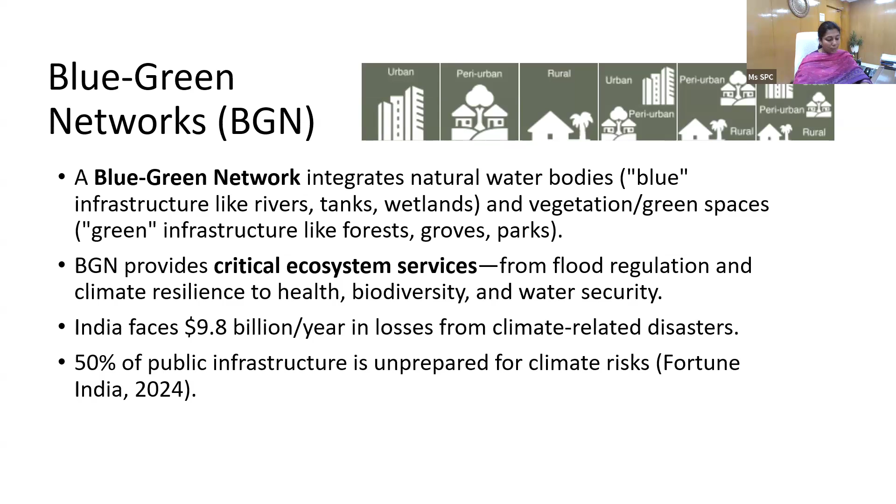In the State Planning Commission of Tamil Nadu, we have a land use research board. The land use research board, with the Aravind Consulting, went about doing a significant exercise of mapping and developing a framework for blue-green infrastructure. We did it at the state level to identify the areas of blue-green network. I'll be explaining all these things in the subsequent slide.

What we went about doing with this framework is developing a strategy to identify and assess the opportunities of protecting the existing blue-green network, and the scope for identifying new areas and avenues in which it could be protected and strengthened further. So a statewide mapping and evaluation exercise was recently carried out. The study is yet to be formally published, so I won't be able to disclose most of the findings, but we have completed this exercise.

In terms of blue elements, we considered all the water bodies, including wetlands and mangroves. Mangrove falls both in the green as well as blue segment. Tamil Nadu, like most states, has got a lot of sacred groves, and reserve forest is an obvious green element. We also assessed the unused land potential, and tried mapping the blue-green opportunities in the unused land as well.

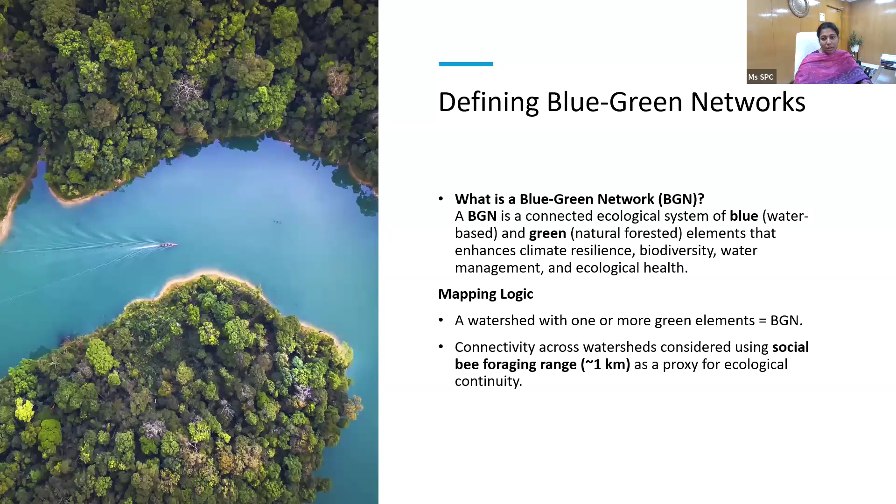We also went about analyzing the ecosystem services it's been providing. Ecosystem services is something not very unfamiliar to us. Different kinds of ecosystem services are there: provisioning services, regulating services, climate regulation, cultural services, and a few other parameters apart from the four popular ecosystem services were also being considered.

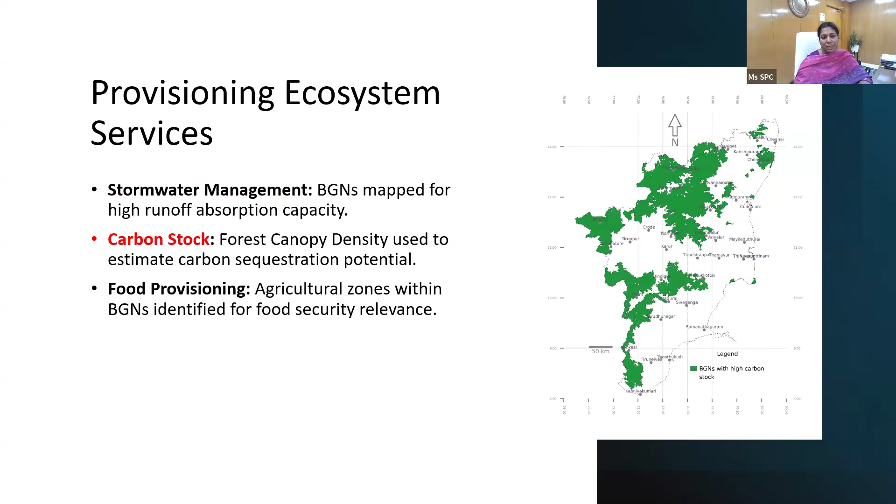For example, this is one opportunity we went about analyzing: stormwater management. You can see the figure of what the blue-green network elements are and which can help in stormwater management. This slide shows the carbon stock potential of utilizing this blue-green network, and food provisioning and all that. In regulating services, soil erosion is one major thing, apart from air quality and water quality. So we went about doing this.

Why are we talking about this with respect to heat? Because urban forest and climate is something Tamil Nadu has been a pioneer in climate action. The SDG India Index 4.0, released by NITI Aayog, also places Tamil Nadu at rank number 1. We jumped from rank number 11 to rank 1 within a span of 2-3 years, because the action on climate and a lot of other mitigation aspects helped the state secure this position.

A lot of analysis was also done taking up this blue-green infrastructure to see how it can help in mitigating heat. Not just this, we also went about doing a lot of urban heat island mapping, identifying the hotspots of the urban heat island effect in the cities of Tamil Nadu. Tamil Nadu is so interested in urban heat island because the state is highly urbanizing, and our urbanization percentage is estimated to be around 52 to 53%.

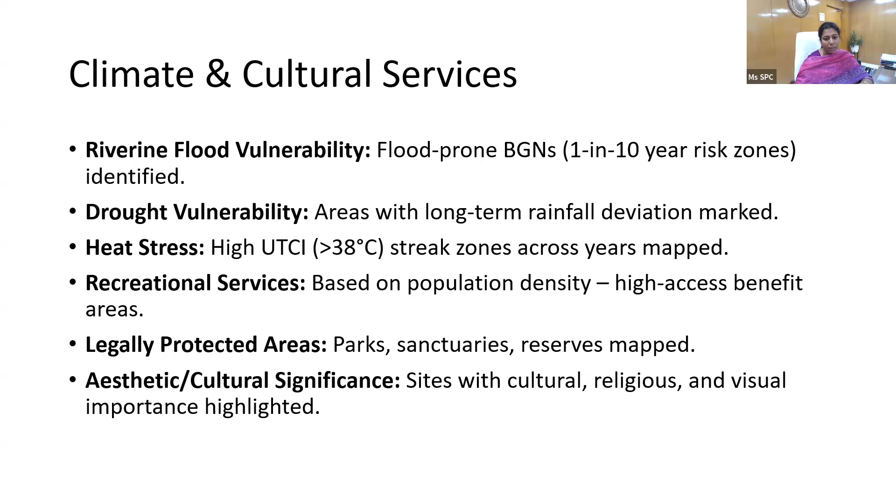That gives us a huge concern about how this urban heat island effect has been significantly affecting vulnerable communities largely residing in urban areas. That was the main reason we took up heat. Tamil Nadu was the first state to declare heat as a state-specific disaster. A lot of mitigation strategies and heat action plans for cities are also being worked out, and a lot of work is being initiated for heat mitigation. This blue-green network identification and potential mapping was one other initiative we took. Apart from heat mitigation and other climate aspects, the BGN also supports biodiversity and network integrity.

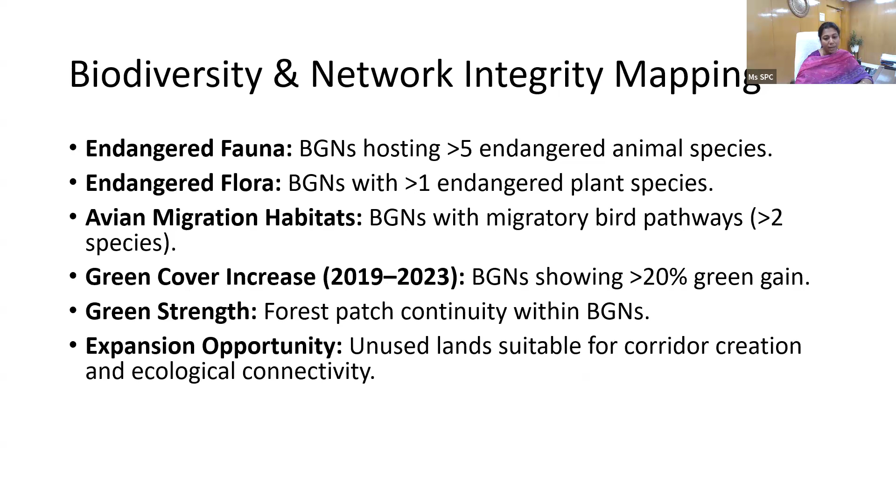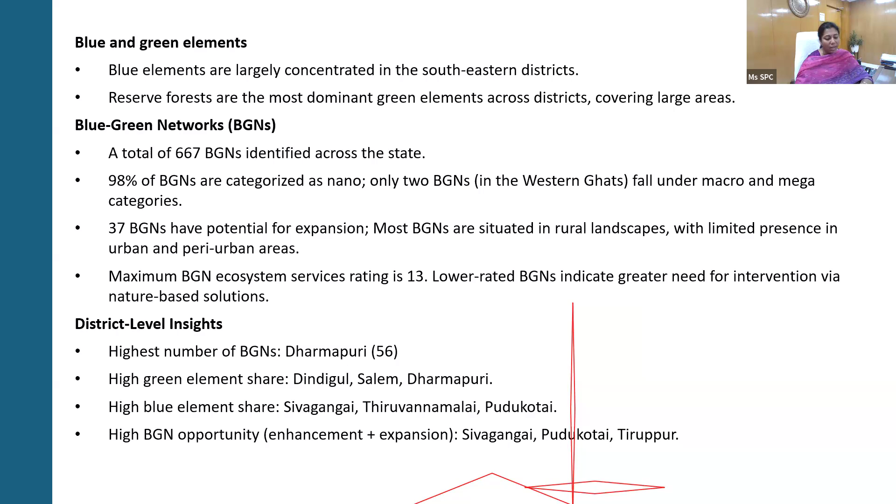By means of network integrity, the green cover strengthening and the opportunity of expanding in unused areas is also significant here. These are the findings: we have about 667 blue-green networks across the state, most of them in the nano category. We are trying to identify mega categories and have got good results, along with potential sites where this could be developed. The opportunities for expansion in unused land have also been identified.

This relates to the activities the state has already commissioned under the Green Tamil Nadu Mission, where within 10 years there is an aspiration of planting 265 crore seedlings to significantly increase the tree cover.

Tamil Nadu has the highest number of Ramsar wetlands in the country. It also aims to increase mangrove cover to support disaster resilience and to increase livelihood opportunities for fisher communities.

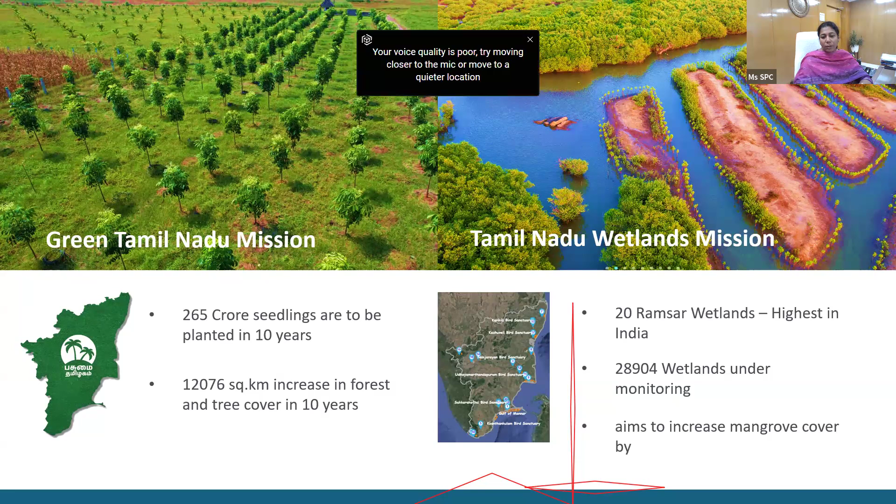Some other initiatives taken by the government include the Sponge Park initiative by the Corporation, with about 150 sponge parks being installed. Sponge parks are one of the popular blue-green infrastructure types, and we know how they've significantly helped cities like Chennai, which faces very frequent flooding. So not just in terms of heat, but also in helping control other disasters, blue-green infrastructure supports a lot.

The CMDA is also actively considering blue-green infrastructure's potential and trying to get it integrated into the third master plan development. About 100 blue-green centers are proposed to be established across the state in the coming years. With this, I end my presentation here.

Yeah, I'm open for questions.

Great, thank you. Thank you so much, ma'am. Thank you for sharing those insights. It's great to see the efforts being taken to improve blue-green infrastructure.

My question is specifically around the urban heat island effect. We know there has been a decline in mangroves and green spaces even in Chennai city, much like other parts of the country. So what are your plans currently to increase green shaded spaces and greening of the city, to ensure that people most exposed to heat stress are able to rest during peak heat wave days?

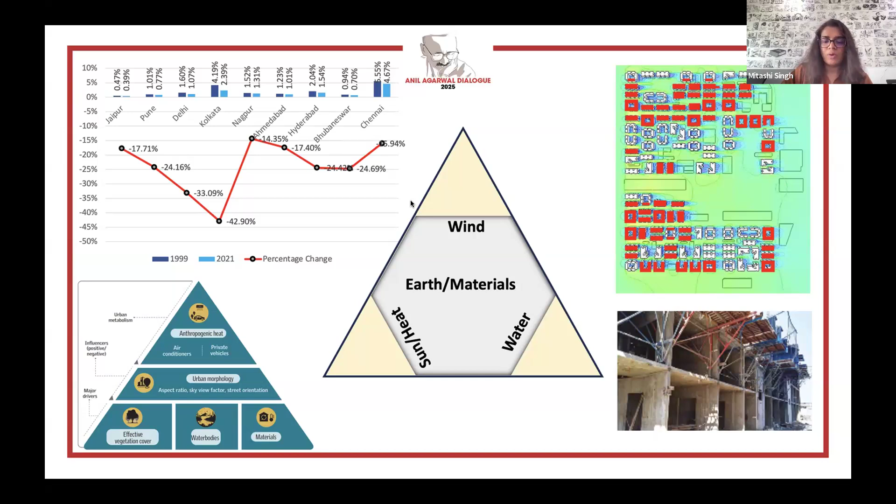So speaking of wind, let's start with wind. What we have seen is that a lot of group housing is coming up in the country. We know land is a scarce resource, and we have to go for a group housing approach. Self-constructed single-story or double-story dwellings are not feasible for our cities anymore. So group housing or mass housing is everywhere in the country now.

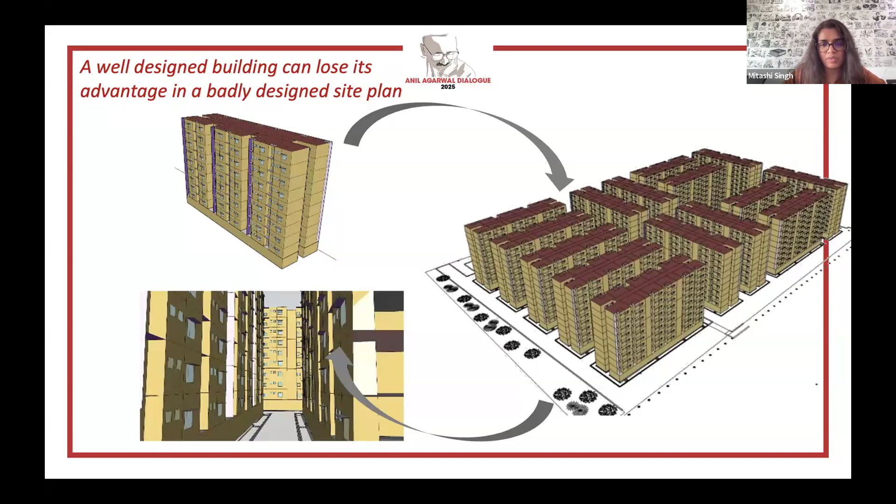Now what happens is when these layouts are done, nobody thinks of the ventilation, nobody thinks how the ventilation is going to be, nobody looks at the natural wind patterns in a given locality. We studied one such mass housing project in the country and found nearly 60% of the blocks were either too windy or less windy, basically not getting adequate ventilation by design. So how do we deal with that? We need to understand this.

Many sophisticated simulation tools are available. We did this using computational fluid dynamics, using MicroFlo software. So these systems and tools are available, but unfortunately, in academia, education, and also in practice, there's very little knowledge about these tools and approaches. So this is about ventilation. Now going on to sun, going on to what nature is doing for heat.

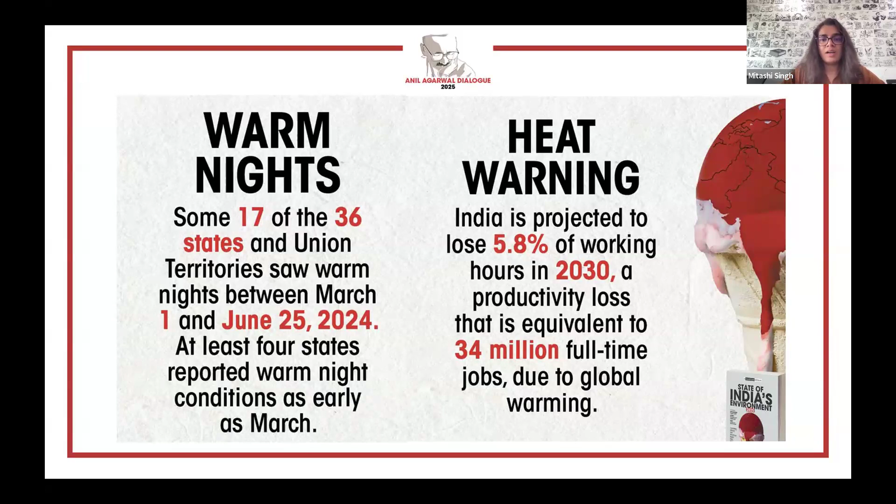All of us are aware that warm nights are becoming a problem. CSE's annual publication, State of India's Environment, found that 17 of the 36 states and union territories saw warm nights in the previous year, and this year also. People in Delhi NCR can feel it right now - the heat is enormous, and it doesn't look like it's going to be pleasant anytime soon. So warm nights are a problem, and they're linked to many adverse public health impacts.

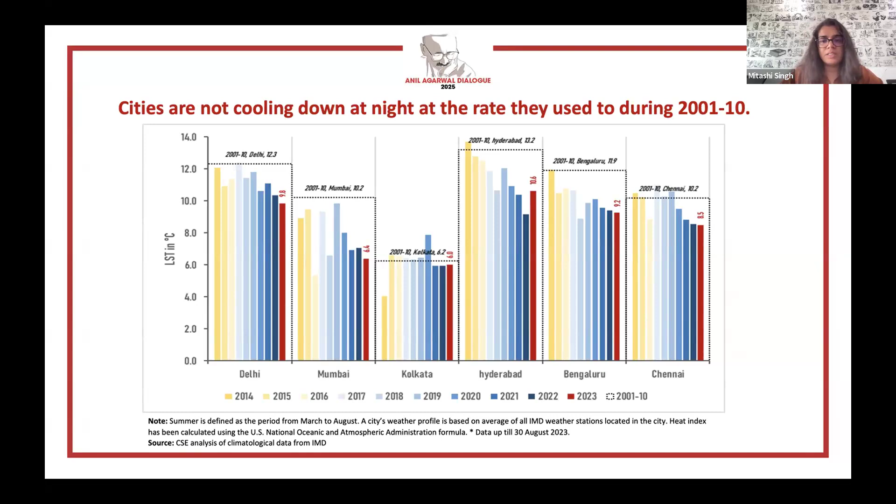If we look at historical data, we can see that cities are not cooling down. The delta that was, in case of Delhi, about 12.3 degrees, has reduced to 9.8 degrees. This means our major cities are not able to cool down on their own, which means the urban heat island effect is more prominent at night time. We need to ensure our systems are planned so that we don't trap the heat from the sun and instead let it go back to space as it should.

To understand this, we analyzed this for 9 cities, now 10, and saw that all climate zones - warm, humid, composite, hot and dry, moderate - are behaving similarly. Land surface temperatures are breaching 45 degrees Celsius again and again. In terms of spatial area, more than 80-85% of a city's area is under heat stress, facing such extreme temperatures repeatedly. This study and its findings were published in Down To Earth's cover story, 'How Hot is Too Hot.' You can find this on our website, and this publication will tell you what we found.

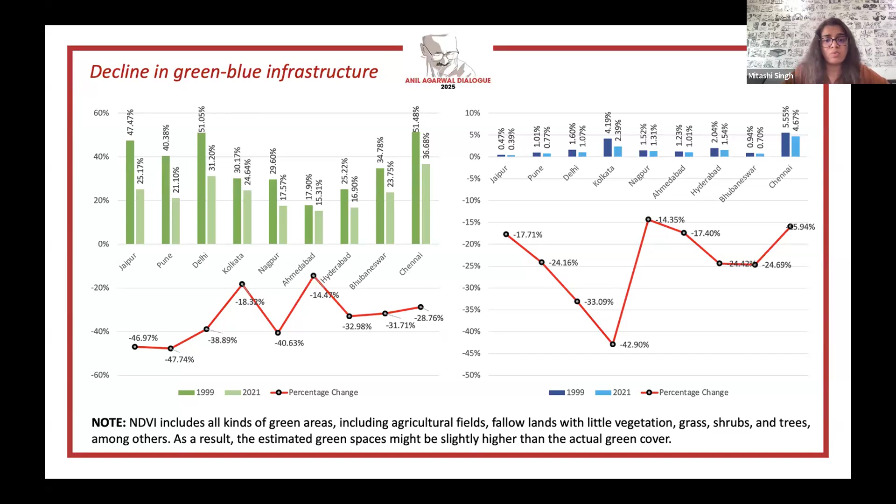We understand that green and blue infrastructure are a very important part of a city's shield. These are the sinks that trap heat energy, use it in evapotranspiration, and prevent the city surface from trapping a lot of heat from the sun. But as green and blue infrastructure reduces and paved surfaces increase, we are trapping more and more heat coming from the sun.

So how can we reverse this process? Yes, this is reversible. To do this, we have to understand 3 aspects: urban cover, urban structure, and urban metabolism. While cover is the larger distribution of green-blue infrastructure and paved surfaces, urban structure is a detailed breakdown of how buildings are clustered, what kind of surfaces they have, their orientation, how much pavement, roads, and such surfaces there are. It also includes the canopy cover of trees around buildings - basically, the total quantum of shading available in a given neighborhood. This is scaled down to a neighborhood or building level.

Speaking of urban metabolism, there are certain urban practices that eject heat into our environment. AC is a classic example, vehicles are a classic example - these are big heat ejectors. But we also have small heat ejectors, like our laptop computers, which also generate heat that goes into the ambient environment. When this heat ejection is quite high, the ambient environment heats up very fast, and because it's hot outside, we run our air conditioning double the amount we would in other scenarios. This creates a vicious cycle because we're not able to regulate urban metabolism well through our planning and natural cover.

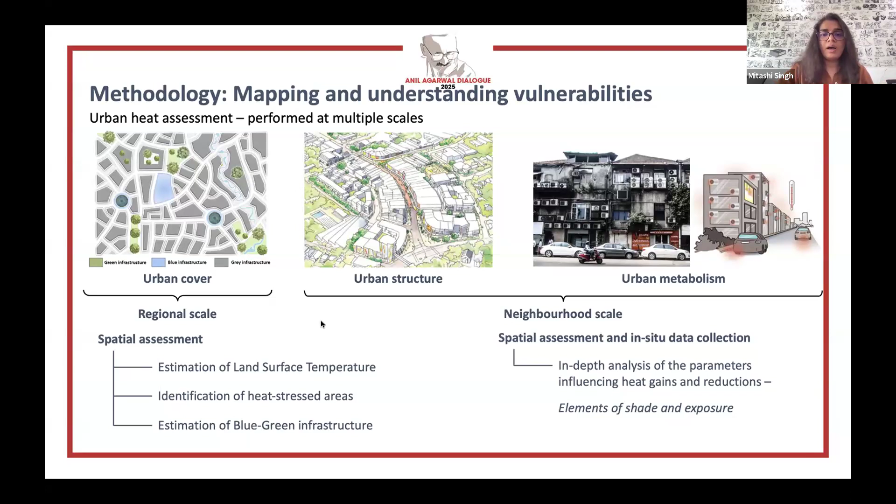So now, all our discussion has boiled down to this element of balancing how much shading and how much exposure there is in our cities, and also what kind of anthropogenic activities are present in our cities.

I cannot go into much detail due to paucity of time, but to understand shading, we explored factors like sky view factor, aspect ratio, and canopy cover of trees. Exposure depends on what kind of material is in the buildings—if heat-trapping material is exposed for longer, it absorbs a lot more heat. We also look at impervious spaces and barren areas, because all these elements trap heat. Surfaces with greens and water are not trappers, instead they are sinks.

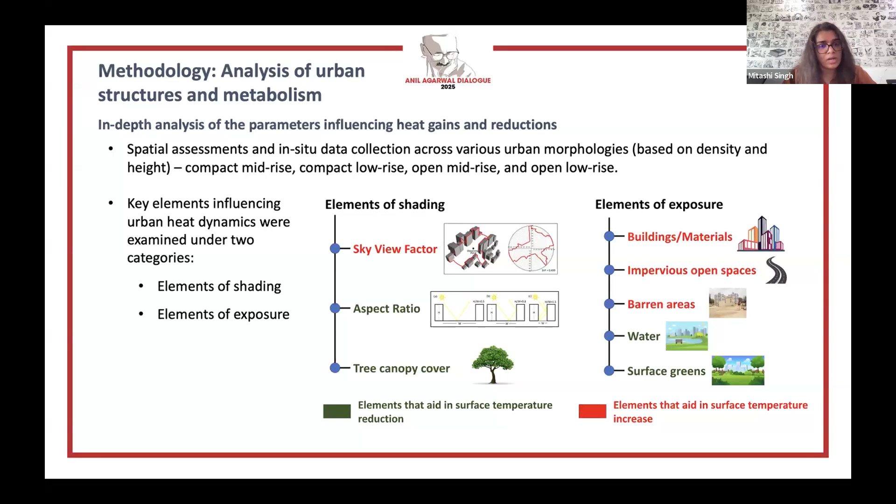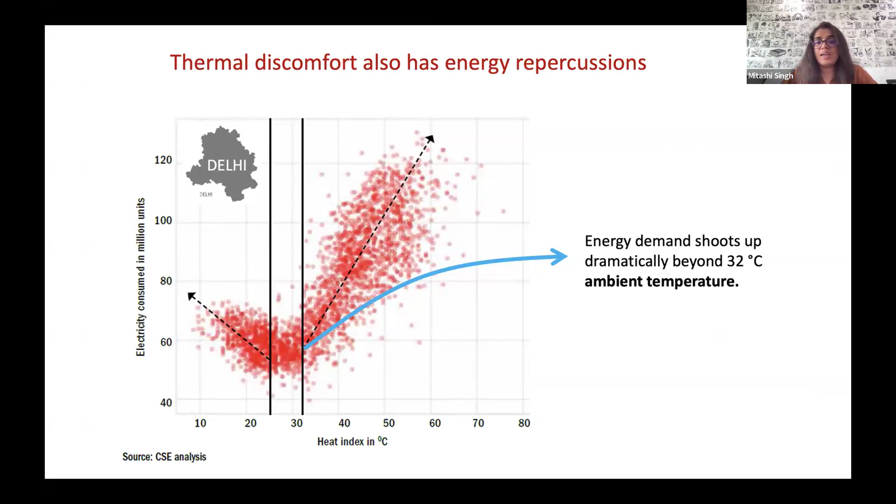The distribution of all these elements is important because this graph shows a dramatic relationship between ambient temperature and electricity consumed. These parallel lines are what we call the sweet spot in our cities. When temperatures just hit 30, 31 degrees, electricity consumption is quite low, but the moment it breaches 32 degrees Celsius, you see a jump in consumption. Our bodies understand thermal discomfort and what ambient temperatures can do to our comfort.

But the problem is we do not factor this into our material choice, building design, or planning. Research we did a few years back shows concrete is becoming a dominant material. I don't want to sound harsh, but in Delhi there's a lot of redevelopment going on—starting from East Kidwai Nagar, residential and commercial buildings have come up. What material have they used? Only concrete. Not just the roof, plinth, slabs and pillars, but entire walls are made of concrete. Imagine what such amount of concrete will do to our indoors.

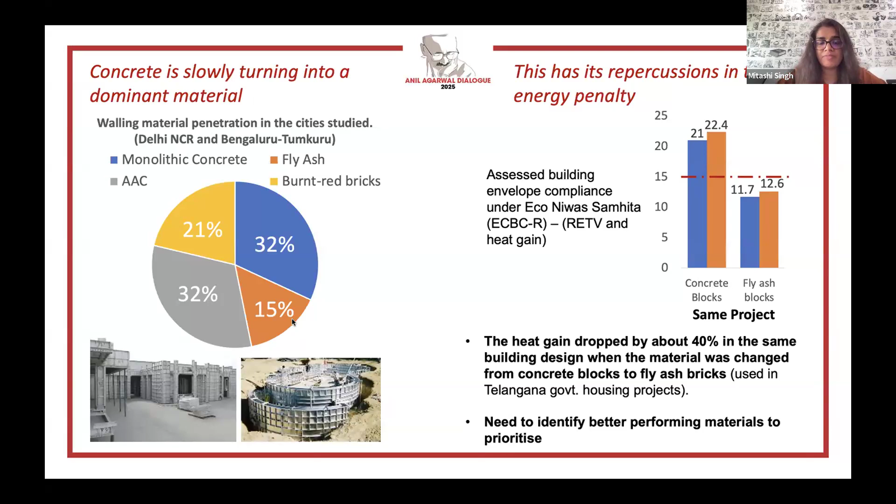This concrete is also reinforced with steel. Steel is a good conductor of heat, metals are good conductors, and concrete also gets heated up very fast. So when you put such materials in buildings, the EPI—the Energy Performance Index—which is way below 50 in a naturally ventilated building, jumps 6.5 times because it pushes the need for air conditioning.

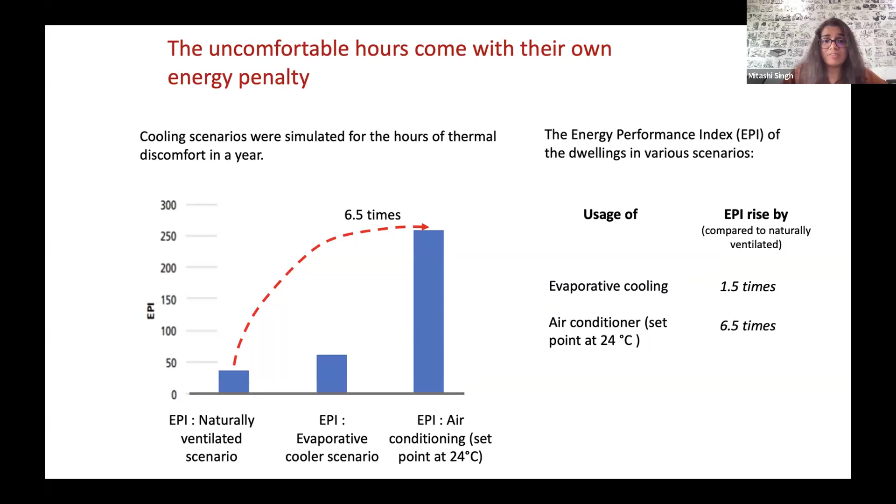This is the impact we're actually dealing with in our cities. Sadly, this impact is counterproductive to the commitments we have. India has the Panchamrit commitment to net zero, and when we do not have a wise selection of materials, a good choice of materials, we jeopardize all these commitments.

But the good news is there are a lot of tools that tell us how to reach this net zero commitment—India's long-term low carbon development strategies, India Cooling Action Plan, Energy Conservation and Sustainability Building Code. A latest version has come up, and Eco Niwas Samhita has come up. These are wins we now see in our cities because these codes guide us in a good direction. But unfortunately, these codes are not all mandatory, so as planners and policymakers we need to push these codes towards mandatory adoption.

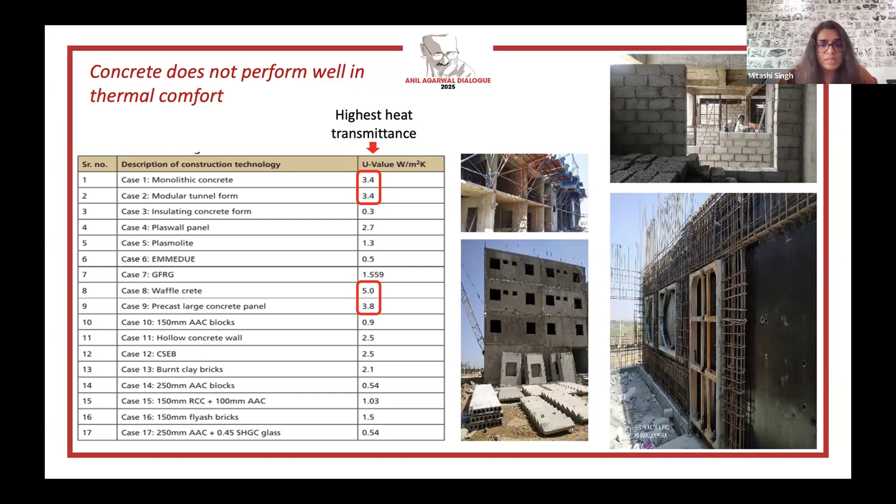We have a lot of materials in use in mass housing. We evaluated them, and monolithic concrete, modular tunnel form, wafflecrete, and precast concrete all have a U value of more than 3.4 to 3.8. In Eco Niwas Samhita, they're looking at a U value of about 1.5 or lesser. So you see where the difference is, and how much the difference is.

So I'll try to summarize now. To address this, we're working on campuses because passive design and dealing with the microclimate requires design, but also requires low carbon cooling systems, because we cannot completely eliminate the need for cooling in our buildings—70% of India's geography has high temperatures, especially receiving hot temperatures in summer. So we will have some requirement of cooling, and we have a very good opportunity to slow down the transition to energy-guzzling air conditioners.

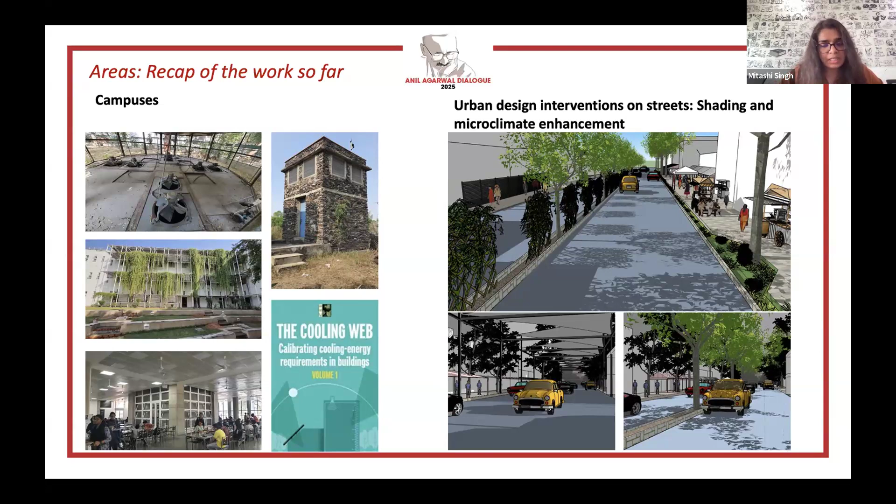All these practices or cases are summarized in one of our publications titled 'The Cooling Web.' Other than this, there are a lot of compendiums by the government also—for example, BMTPC has come up with an indigenous innovative material compendium.

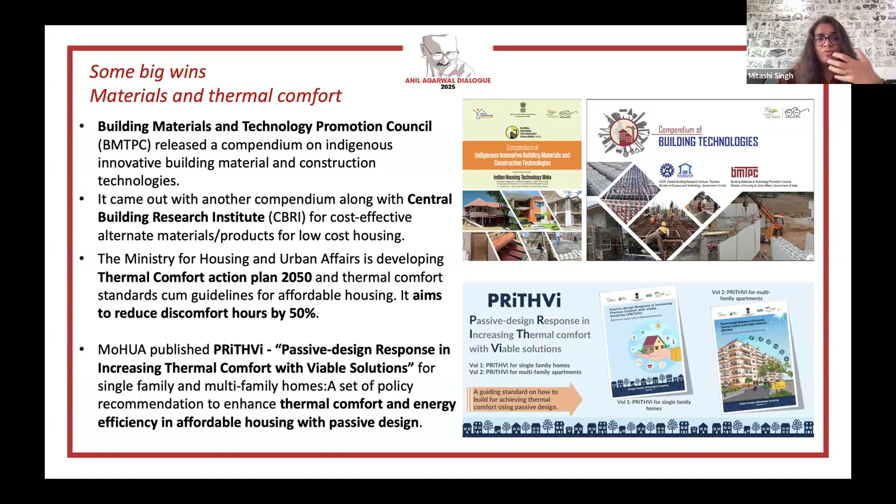There is a thermal comfort action plan under preparation by MoHUA. There's also a Prithvi program that talks about increasing thermal comfort in affordable housing. So a lot of knowledge is out there, but the problem is we need to get it under implementation. Now, how will this get implemented? By creating a demand for thermal comfort.

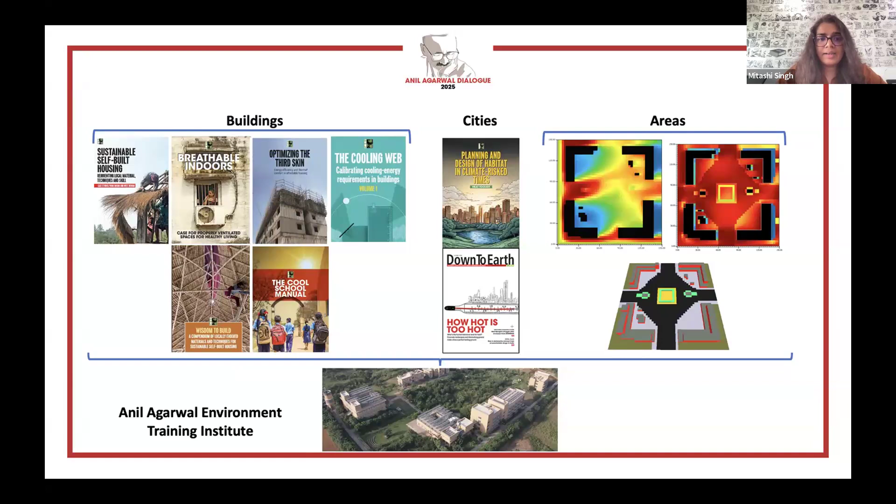I know it's very difficult to change human mind, but that is exactly what we need. CSE is working on this. We have a campaign called Cool It, and under this we are releasing information to create literacy about thermal comfort, so that people know how small design decisions and measures can help them prevent energy consumption, reduce energy bills, and also keep their health in good shape when it comes to thermal discomfort. That is the work we're doing.

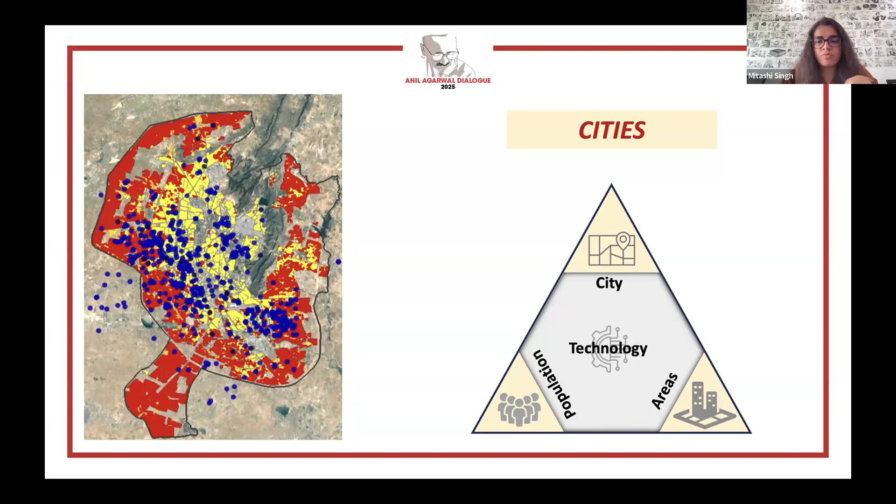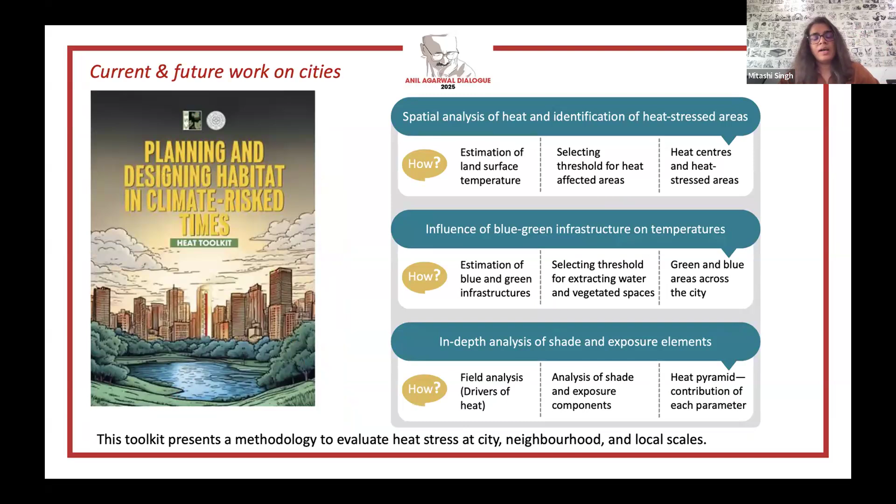We are also working on cities, and on different vulnerable communities. Our city work is there in this toolkit, called Planning and Designing Habitat in Climate-Risked Times. You will see how we have evaluated heat stress at city, neighborhood, and local scales. There is a case of Pune, and there is also a vulnerability assessment for heat, with the case of Kolkata.

Speaking of vulnerable communities, we also work with school children and construction workers, because we identify all these as vulnerable communities. This is an example of the heat vulnerability assessment we have done for Kolkata. We found that so many wards are highly vulnerable, because of the people who live there, the conditions those wards have, and the level of services these wards have. Certain parameters and indicators were taken into consideration. I cannot list them all here, but you can definitely take a look.

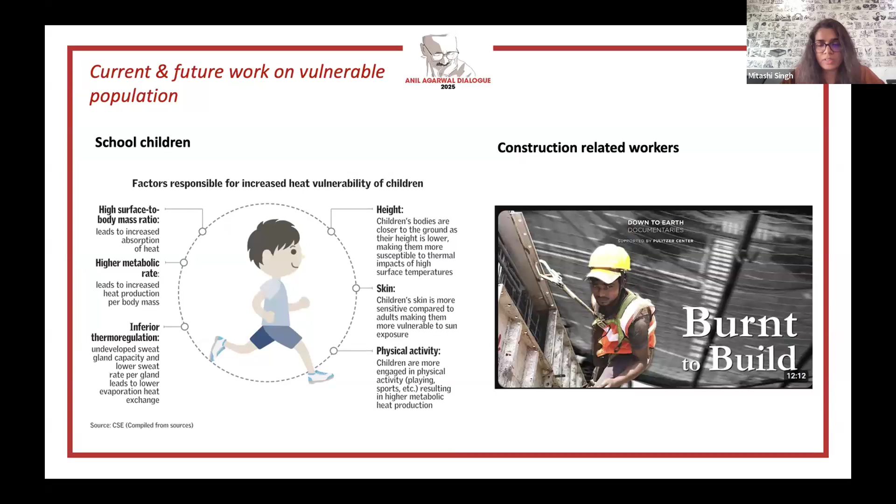It's all published. This is a video we made for construction workers to highlight what kind of issues are there. For school children, we look at how many water taps and water stations are there, the ratio of water stations to children, accessibility to those water stations, how the buildings are clustered, and what kind of passive design features the school has or can adopt. All these have now become part of our work with schools. This work is available in the school manual.

You can take a look and find out that we really have a dearth of data on the impact of heat on school children in schools. Children are a vulnerable group because they don't know when to hydrate. You have to tell children to drink some water, cool themselves down, have some fruits or glucose. This is what makes school children vulnerable to heat. But who looks after that when they're in school? This is a big concern for parents, and it actually comes down to the school to look after this requirement and how well they do it.

There is no qualitative data about how schools currently are dealing with this. So there is a case to push this with CBSE, and a case to push this with other education boards, and all this you will find under the school manual.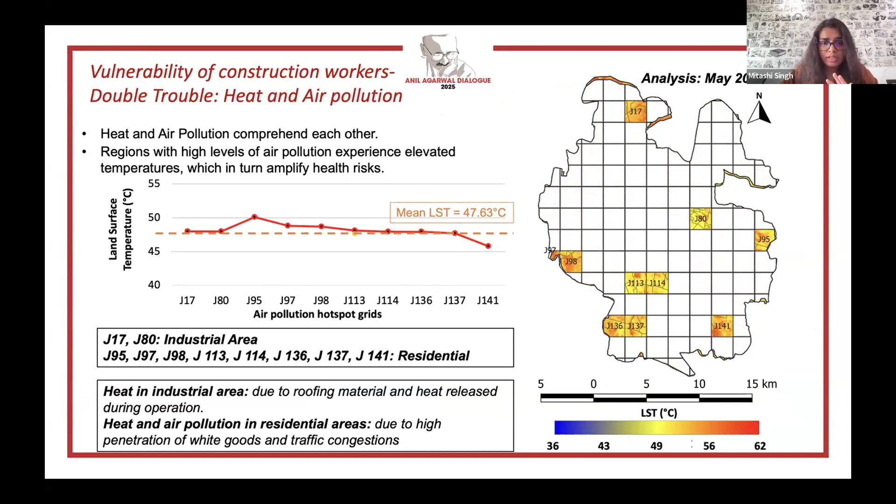Now, for construction workers, we look at their vulnerability to heat as well as air pollution. Very interestingly, both these vulnerabilities are correlated, so the heat spots are also air pollution hotspots.

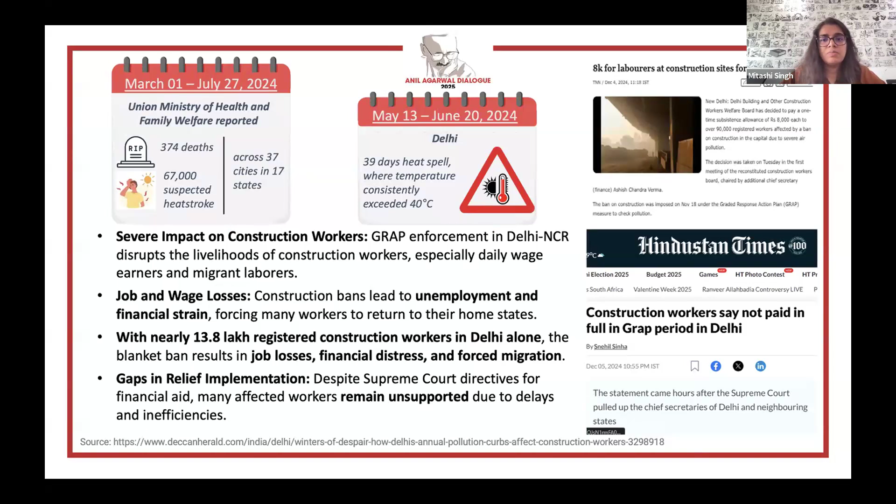In Delhi, we have GRAP. Whenever GRAP is enforced in the months of November or December, construction workers lose pay and livelihood. There is a compensation program by the government to make up for that emergency period. But when construction is stopped during a heat wave period, what happens then? So far there are no provisions for this, but we are trying to make a case for it.

We need to look after their requirements, as Madam Sudha has also highlighted: working hours, standard operating procedures, when it's very heated up, let's say in the afternoon, a person should not work at heights because the possibility of getting dizzy and falling down is higher. Measures like this need to be combined in a standard operating procedure, which the Department of Labor has to take up. Then facilities for construction workers on site: how they live, what kind of services are available, medical services, water availability, sanitation requirements, and safe, potable water.

And if there are kids at the construction site, special measures are needed for that. So there are many requirements that this vulnerable group particularly requires, and there is a need to work in that direction. This is an example of something we are currently working on.

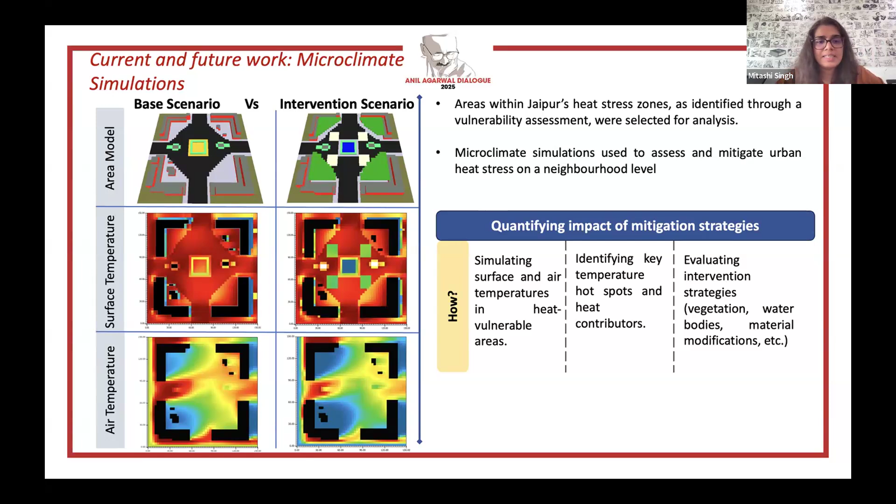So we're simulating microclimates. This is just the final thing. So this is basically what we're working on. We've done our work on cities, but now we are simulating and seeing how the microclimate behaves in different cities, because that is what will lead us to what kind of prioritized measures are going to be there - short-term measures that work, medium-term and long-term measures. So this is the nature of work.

And you will find all that work on this Cool It campaign page. This is a snapshot of what we're doing. Madam Sudha Raman was also featured in one of our videos under the Urban Heatscapes video docu-series. She was part of the Chennai video, so you can take a look at that. Similarly, there is a lot of stuff that now has come up on heat resilience in cities. So that's all from me, and happy to take up any questions. Thank you.

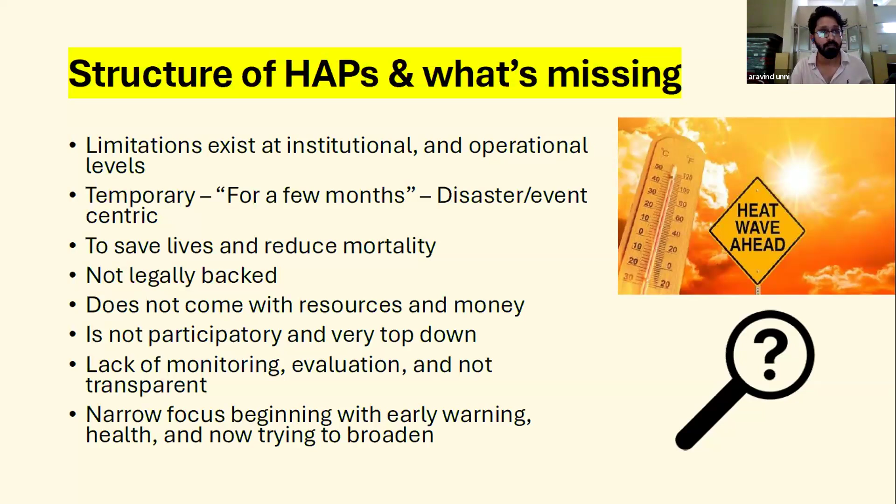My presentation and the points I'm making are primarily looking at heat action plans and how we can improve that or make it more inclusive. I know it's a little limiting in that sense, but I would stick to the heat action plan and advocate for the inclusion bit, and then see if we can broaden the debate.

We essentially, when we say outdoor workers, we think that they are men, they are outdoor, they work outdoor, they have caps, and they are like construction workers, right? I mean, going towards that spectrum.

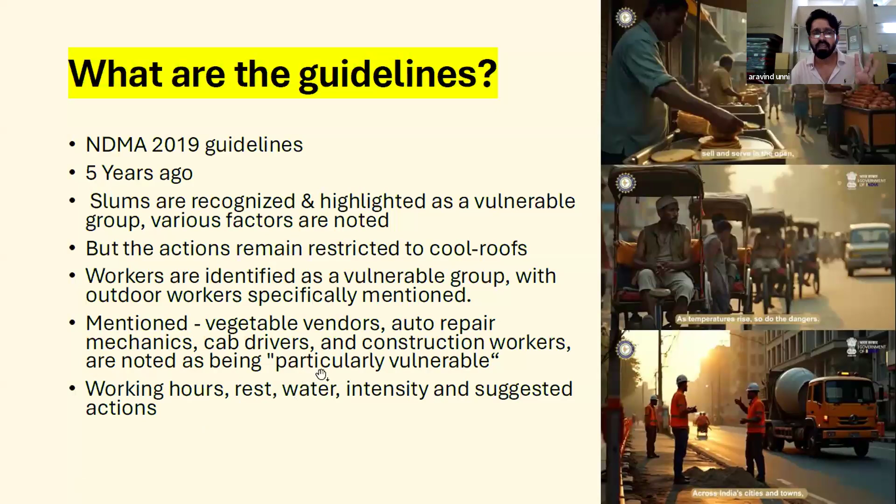Again, to bring a little gap on what exactly is happening right now, I'm just giving quick examples. We picked three heat action plans of different cities that are the most recent and are the best examples of relatively good heat action plans, and are sharing them with you.

So they have increasingly started to identify more worker categories and groups, which is great. I think we are all happy with that. They all identify informal settlements as a key area of work, which is again great. But you see that the numbers still don't capture the diversity that we have, because each worker group is different.

Their working areas are different. They are also indoor, but they are also outdoor. There are so many workers that are indoor. Like look at home-based workers, look at domestic workers, but we don't have guidelines for them. Look at...

informal settlements, for instance, there's a very small number of actions on what could be done in heat action plans, but that's also because the heat action plans are structured in a certain way.

Taking this, what are we asking for? I mean, we are coming straight to the ask, but maybe we can have more rounds of discussion and then think of how we got to this as well, right?

But it's essentially that what we are asking right now is that, looking at the limitation of heat action plans, can you fix urban informal workers as a priority group in the vulnerable group? If you release an advisory that the states and the cities have to follow, that would be a big help. So firstly, we are demanding for an advisory note.

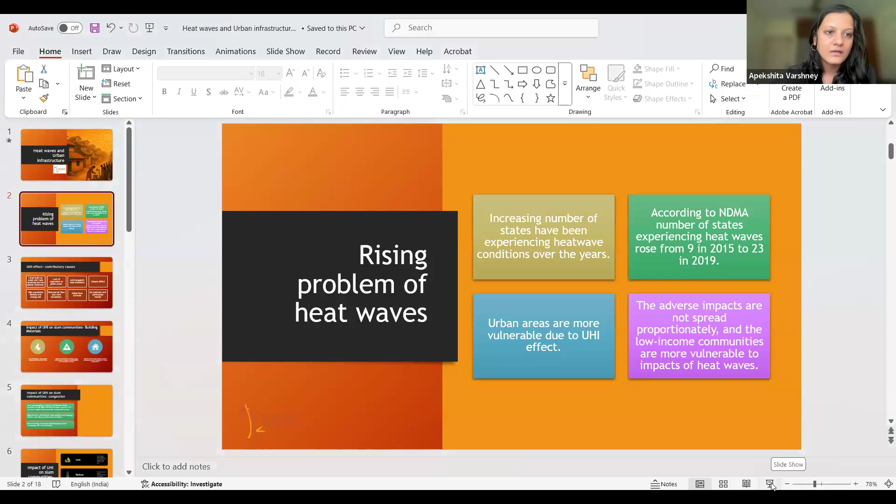Actually, majority of that information is already covered by the last three speakers, so I will be quick. Wherever it is repetition, and whatever points are new, we will take them in a detailed way.

As some of the speakers were sharing, this problem is arising especially in urban areas because of the urban heat island, and how an increasing number of states have been experiencing heat wave conditions over the years. If you see the NDMA 2019-2020 report on their website, every year the number of states is increasing. Though there was a little fluctuation in 2022, even post-2022 we are experiencing an increased number of states in heat wave situations.

Because of this urban heat island, we are seeing the impact of this heat wave especially among the vulnerable community, those living in slum areas or unplanned settlements. They are the ones more directly affected by this heat wave, and the adverse impact is greater towards these vulnerable communities rather than those living in luxurious apartments or with other luxuries.

If we see the causes behind this effect, especially why these vulnerable communities are affected, it's due to large built-up areas with heat-retaining, low albedo material, which we have seen especially in cities like Kolkata, Delhi, Hyderabad, and Bangalore. There we see a huge difference between these areas and their surrounding areas, a 1 to 7 degree change in temperature. There is also lack of vegetation and green cover, which Mitashi already covered, so I will not repeat it here.

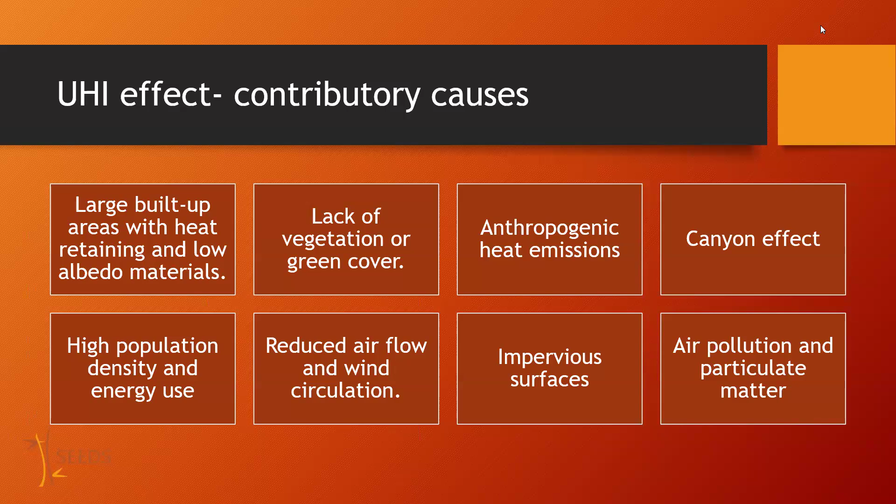Also, high population density, because of human activities, people are living in a very dense population, 5 to 10 times more than rural areas and nearby towns. Because of these human activities, transportation, and electricity consumption, so many activities are happening. This is the reason we are experiencing these crowded conditions. They face 5 to 10 times more of this situation than people living in rural or nearby towns.

This part is already covered by the last colleague, so I will not repeat it.

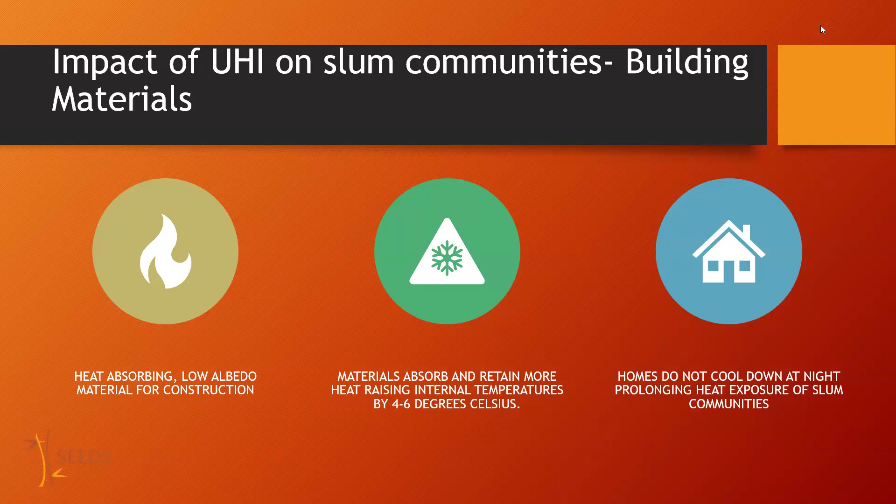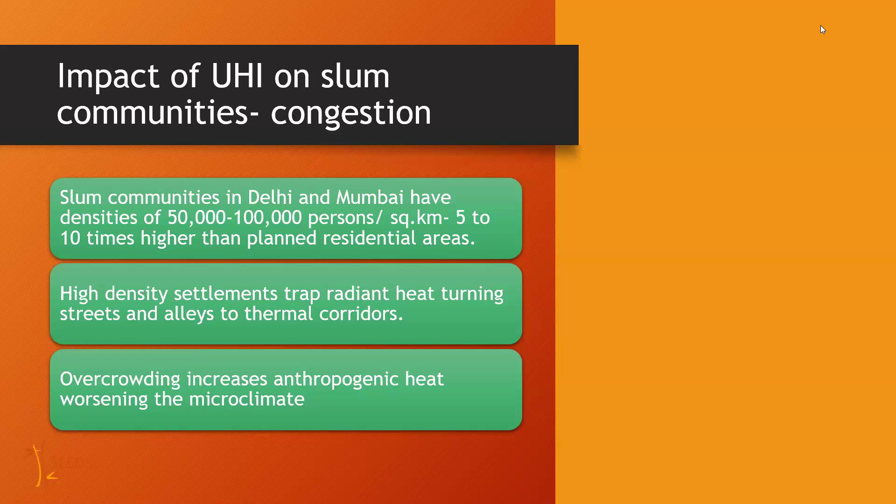If we see how it is impacting the community, there is a lack of green spaces. One major cause we have witnessed is that people are not there for every time; many times authorities demolish their area, so they don't want to build kacha kind of construction. They try to build pakka construction, which reduces their green cover, affecting things a lot. This settlement lives in a very shaded situation, and green space can reduce the temperature by 2 to 4 degrees Celsius. Concrete and bare soil dominate the landscape of this area.

This was already covered by Mitachi.

If we see how it is impacting, heat stress is more intense and longer lasting. Days of heat are increasing, even nights are hotter than in previous years. Lack of cooling options and infrastructure issues are very limited among this population because of lack of resources and lack of money. Heat increases risk to vulnerable communities more because they have to go and work in open areas, and many times they are losing their livelihoods.

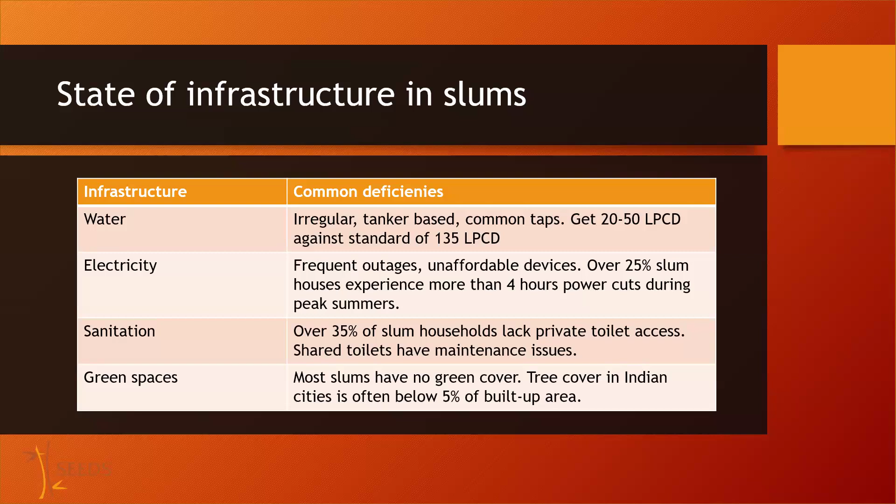Green spaces are decreasing because when people have to construct any green space, they also have to maintain it. But because of lack of resources, lack of time, and because they don't think they will live at the same place for a long time, since many areas are unplanned and they always think the authority will come and demolish their area, they try to construct pakka and concrete infrastructure for everything. Even the play areas are completely paver block, completely closing off the green grassland.

Climate responsive shelters are required if we want to fight this heat situation. Climate responsive interventions can be... just give me one minute.

Just give me 1 minute.

Climate responsive shelter interventions can help mitigate the impact of heat waves on low income communities, because they can reduce the temperature, and with that they can improve their health, their mental health, their livelihoods, and their education.

Climate responsive design uses passive strategies rather than mechanical cooling. It's not just about infrastructure, it is about small changes and small ideas which can be utilized for decreasing temperature and increasing well-being.

It can provide thermal comfort, minimize energy usage, and offer cooling options. There are many low cost and friendly options available. The number one thing is to ensure that this knowledge and these innovative solutions reach these communities, so they can access the material and know the skill to utilize it.

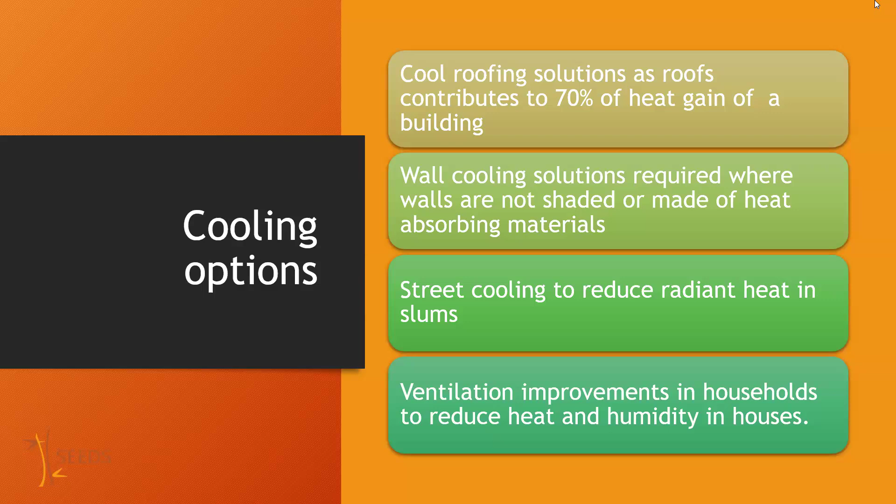Street cooling helps reduce radiant heat in slum areas. Ventilation also plays an important role because people are living in a very close setting, a very dense population area. If ventilation can be provided, it will reduce their problem a lot.

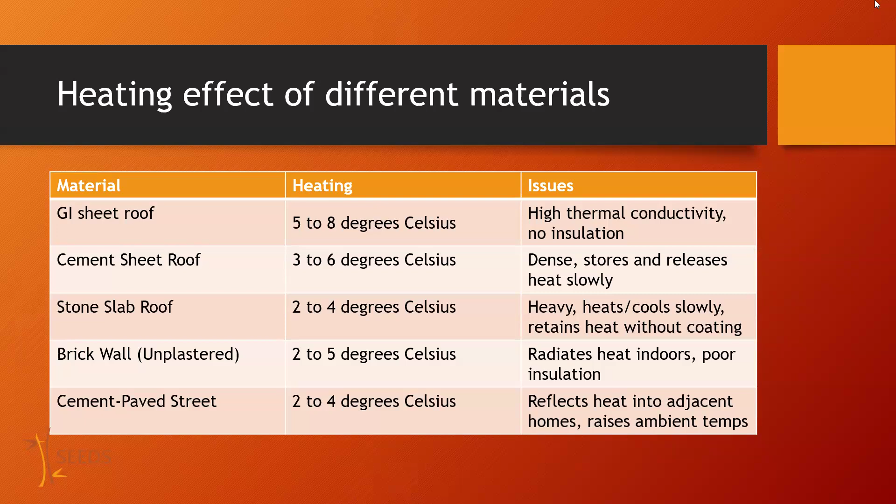So these are just numbers. Those who are directly involved in the construction part or in providing knowledge to the community can help them understand how this kind of material increases heat, which can be avoided in any new construction, and in old construction they can repair it or change their strategy.

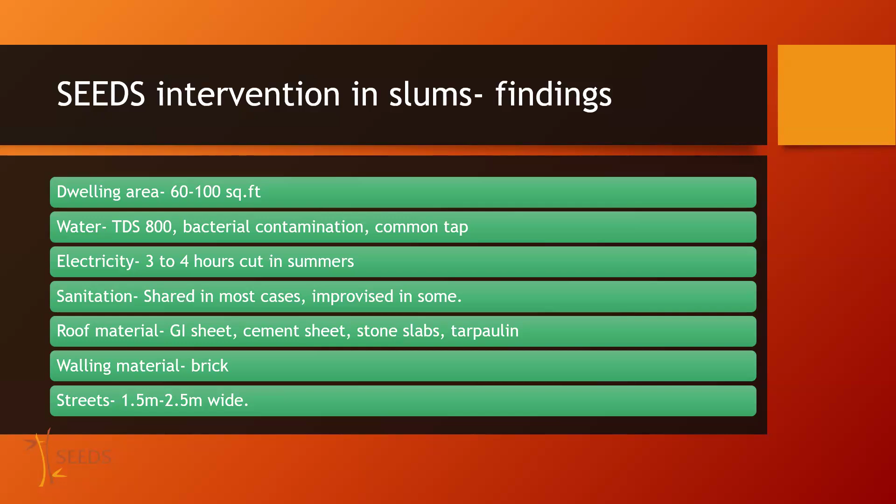We have done two solutions: cool roof solution and street shading. In cool roof solutions, we have done industrial and non-industrial approaches. In industrial, we have used painting and bubble sheets among others. In natural, we have used bamboo, earthen jute, and earthen pots. For street shading, we have used recycled material such as plastic boards to cover the streets.

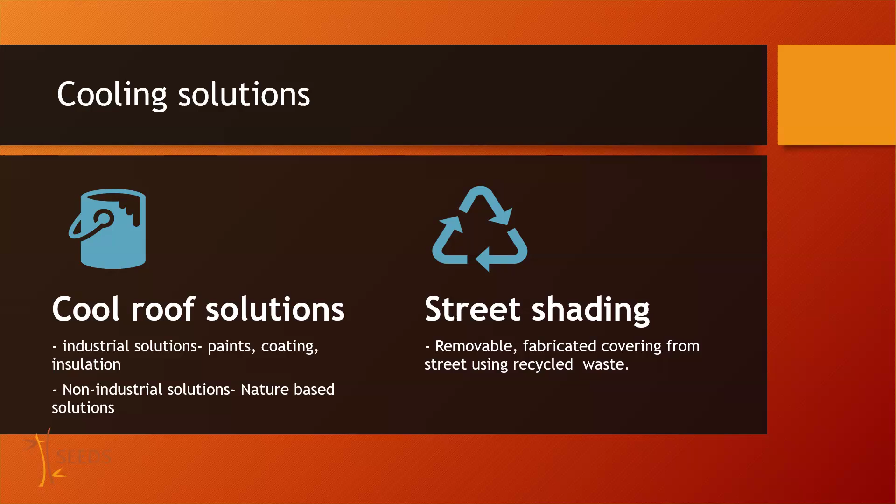What was the criteria for selecting solutions? The community can afford the material, it is easily applicable, there is easy access to material, no labor needed or they can do it themselves, low maintenance, and it can be easily replicable.

What are the results? Suppose we have used paints - it reduces temperature by 4 to 7 degrees, and it is fast and highly suitable. We have used traditional lime, which reduces 3 to 5 degrees, low cost, but needs annual maintenance.

We have used recycled roof panels, which reduce 6 to 8 degrees, but can be used for semi-permanent houses. Double roof with tarpaulin reduces 3 to 6 degrees, low cost. We have also done vegetation, which reduces 4 to 6 degrees, but it can be done only on permanent slabs or stone structures.

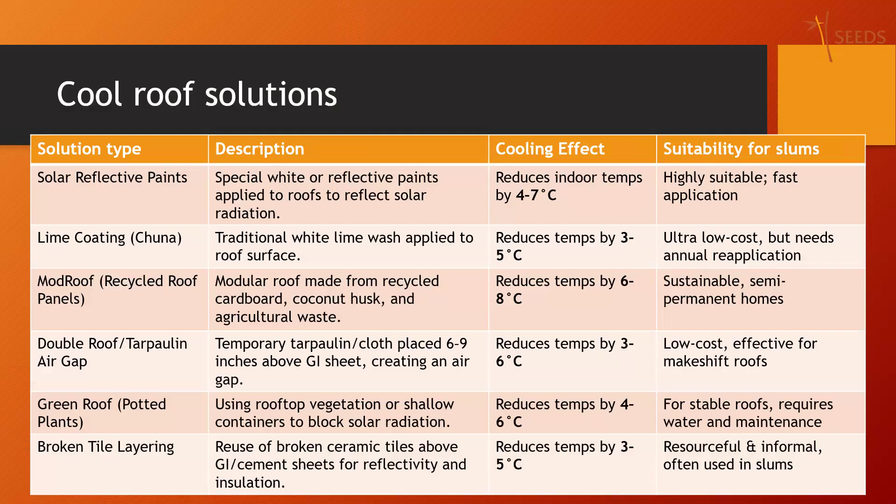What are the impacts? In general, we can reduce temperature by 7 to 8 degrees. There is improvement in work environment, reduction in devices and coolers needed, and a positive impact overall. Thank you.